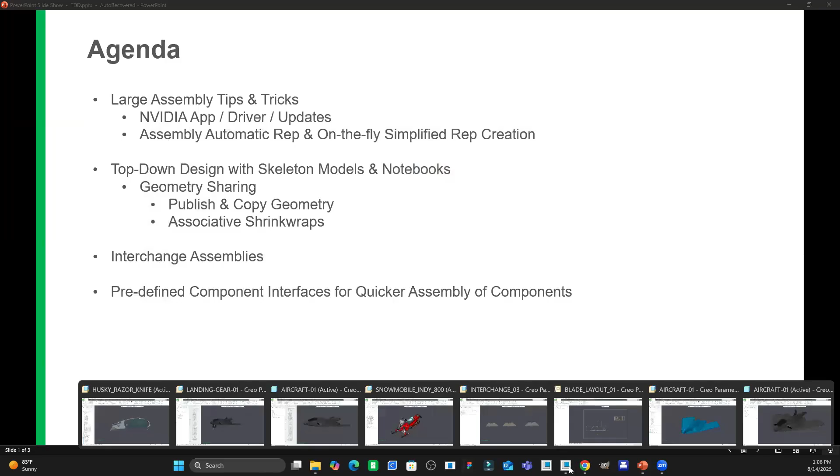All right. So now we'll just take a look at, this is a snowmobile that I opened up, and it took quite a bit of time to open it. It wasn't too bad. My computer's pretty beefy, but I wanted to show something that will help you with very large assemblies and being able to open those up quicker. So I'll close this out.

All right. So I have my directory set here, but I'm going to go to open, and I'm going to locate, and there's a quick access. I can filter parts, drawings, and assemblies. I'm going to locate my snowmobile assembly, select it, and if I go to open, there's a drop down and

there's automatic. So if I select that, it's going to open the assembly with the least amount of data that it can. So it's going to be a very lightweight rep of the assembly, basically just for visual purposes. So that was pretty quick, right?

And that's because it's very lightweight, right? So if you just want somebody to be able to open up the assembly, or maybe your manager is going to walk by, or there's a coworker, you're like, hey, I want to show you my progress and just spin this thing around. This is great.

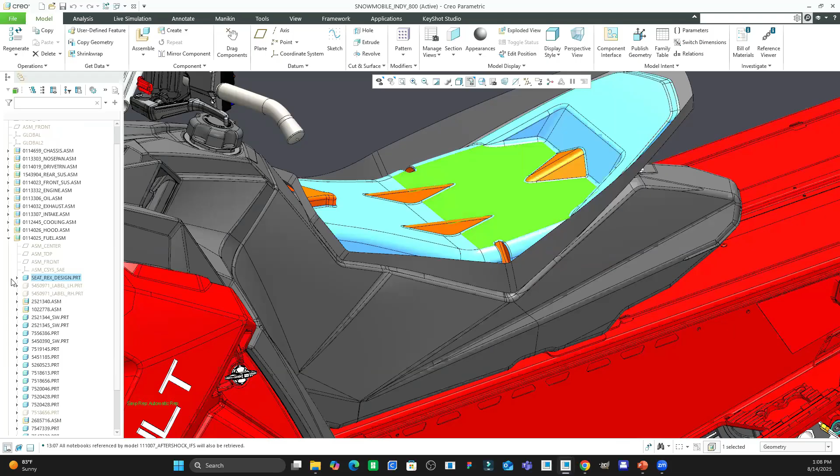Now, if you have to work on it, you can actually retrieve all the data that's associated to the parts so that you can work on it. So I can select this, for example, and then there's a retrieve icon in the mini toolbar here. And then when I do that, that gives me access now to all the features and stuff of the part so I can work on it. Okay.

I also want to show this. So I'm going to open up the assembly again. And a lot of people don't know that you can say, for example, you only have to open up a specific subassembly of a larger assembly or something, right? And you want to not have to wait for your large assembly to open. What you can do is you can go to find your main assembly again, your top level assembly, go to open, and then there's open representation.

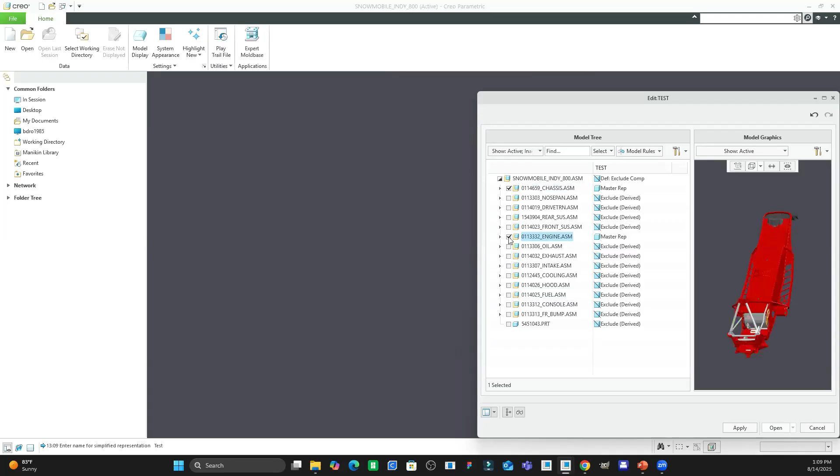If I click that, I can either select a rep that I previously created, or I can define a new one on the fly here. So I can select this button like that, and I can give it a name. And then from here, I can say, hey, I just want to open up the chassis, or I just want to open up the engine and the chassis. So those two assemblies, right? So of course I could have named this rep chassis and engine. It would have made more sense.

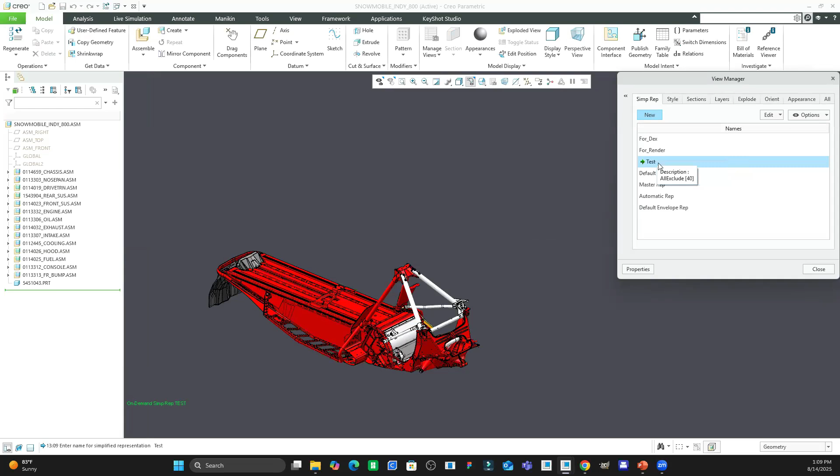But now on the fly, I can click open, and it's just going to open up that rep, and you can see it here in the view manager, that I have that test rep here. Okay. So it's just a couple of what I would consider tips and tricks here. Okay. Now I'm going to close this out.

All right. So now let's go to a different assembly. Or actually, let me move to this slide. So now we're going to talk a little bit about top-down design and concurrent engineering and designing. So, a lot of companies use a bottom-up approach, and sometimes it depends on how experienced the engineering team is, how large or small the team is. If you have a few guys that are really experienced and the products aren't extremely complex, a bottom-up design approach may be just what you need. And incorporating a top-down design process may just convolute things and add complexity that you don't need.

But if you're working with large assemblies and there's data sharing, and you want to streamline your assembly process and have people working concurrently on the assembly without problems, then incorporating a skeleton part for the top-down design process is good. So to start off with, to incorporate the top-down design process, it would fall on the lead integrator slash designer, or the engineering manager, or the head engineer, and they would come up with a plan as far as what to include at the top level in the skeleton model to drive changes throughout the assembly, or to propagate changes.

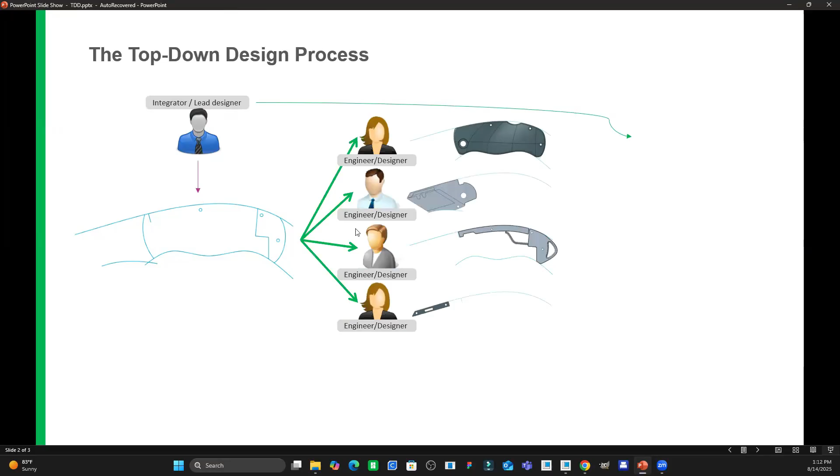And then there's another engineer, and you can see that he's developed this skeleton sketch of the razor, and all these different engineers are sharing that data into their subassemblies or parts, right? So these blue lines are the sketches of the skeleton part, and they've shared those in, and they've created an association between the solid geometry and those sketches, so that if the sketch in the skeleton part is updated, those changes propagate to these components and they update without any problems, which is pretty powerful.

At the skeleton part at the top level of the assembly, you could add solid geometry as well to the skeleton. And the good thing is that whatever you add to the skeleton will not add weight to your assembly. And also you can exclude that skeleton part from your BOM as well.

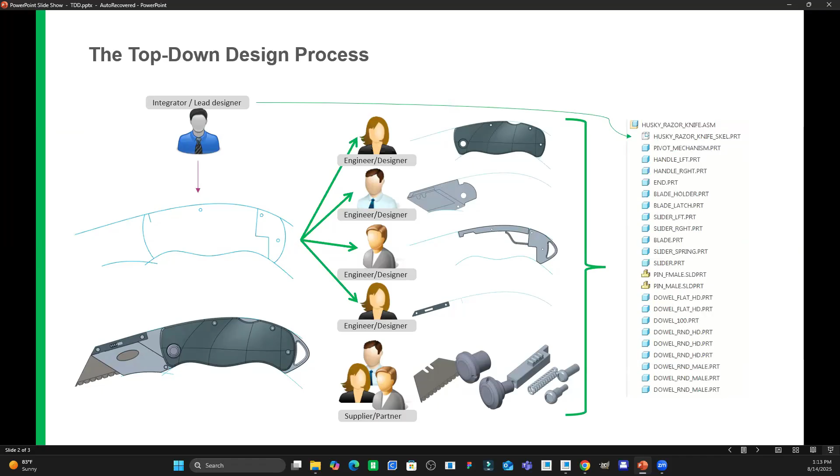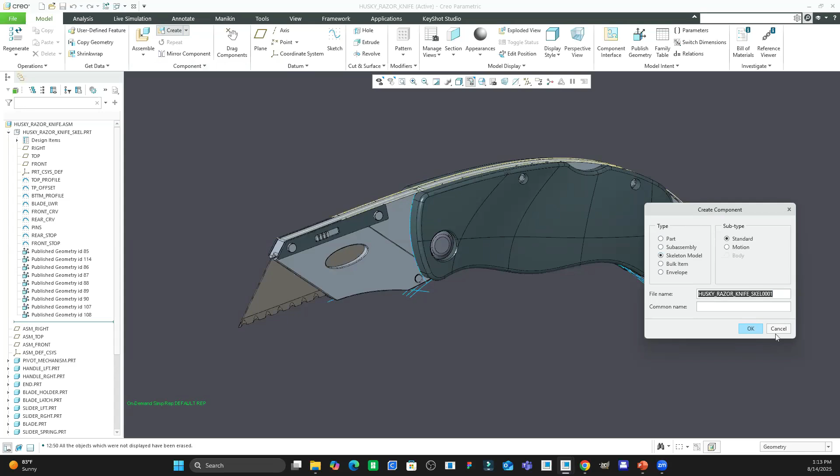Okay, so here's the actual razor assembly and the Husky razor skeleton part. You can create the skeleton part from the create button in the component group in the ribbon. So there's part and then there's skeleton model. You would just select this node and give it a name. We already have that, and you can see here that there's different sketches that are named that drive the assembly.

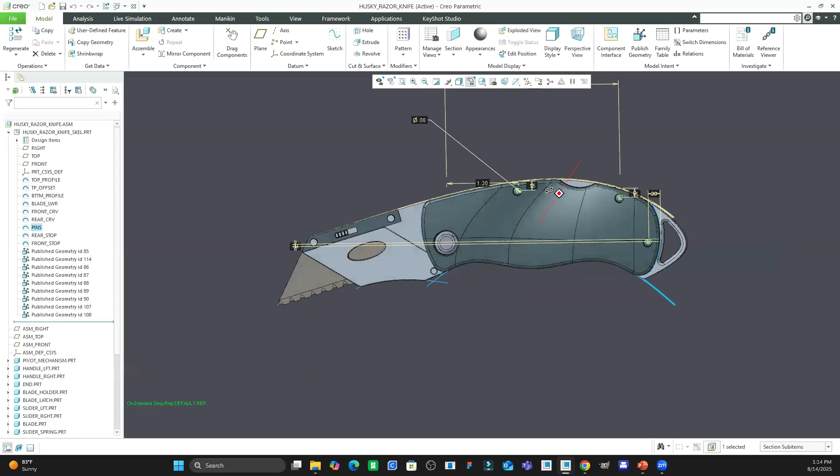So there's top profile and highlights in green here, right, in the window, top offset, bottom profile, and we can go into some of these. There's the pin. So if I go into my edit here, you can see that these pins are created here in this sketch. We can move these things around. And then there's these published geometry features.

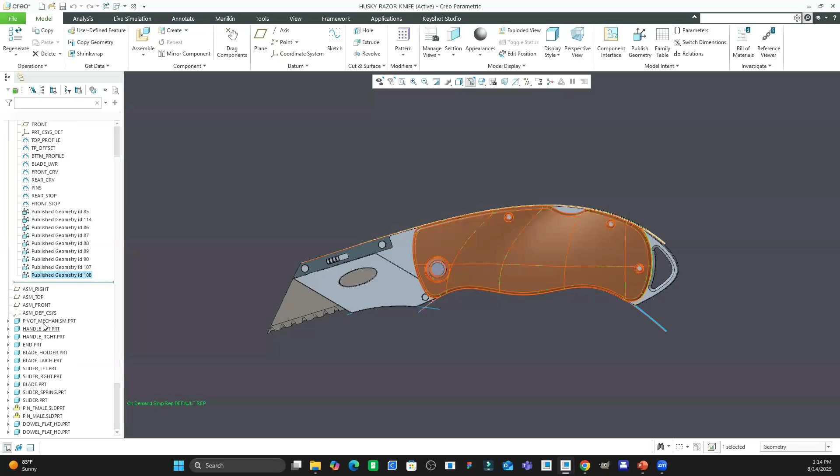So after you've defined the data that you need in the skeleton part, whether they're a combination of sketches, additional datums to the default datums, surfaces, or whatever, if you want to make it easy to share that geometry or data into parts, you would create a published geometry feature. So for example, I would go to model intent, or, go into my part here,

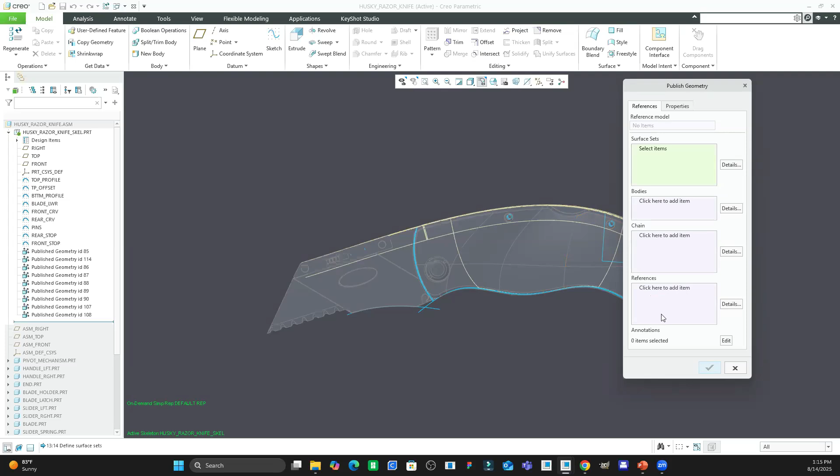model intent, publish geometry. So the published geometry lets me collect surfaces, bodies, chains or curves, and references, right? Like datum planes and coordinate systems, axes. So I can collect all four of those types here, right? And then once I do that, if I want to share that geometry into a part, it's very easy.

I can go into my component, activate it, and you can actually see they already have four of the external copy geometries, which are actually the published geometries from the skeleton part. And to do that, all I have to do is create a copy geometry feature, and you can see it automatically enables the published geometry in the content group.

And if I want to share any of the published geometry from the skeleton into this component, all I have to do is just select it here. Okay. Now that's all already been done, so I'm not going to do that. Now, if you didn't create a published geometry feature to share geometry, that's okay. You can still share geometry from your skeleton part. You would just have to deselect the published geometry button.

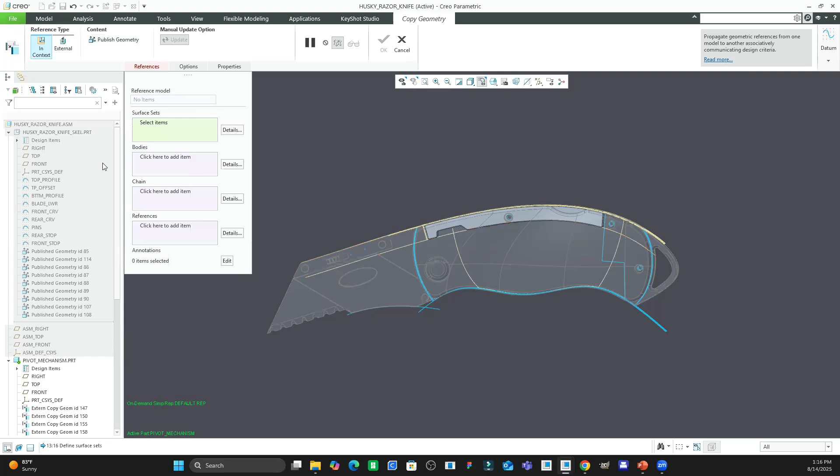And then from here, you would go in here and select the surfaces, bodies, curves, or datum planes, for example, that you would need. Okay. So if I select each one of these, there's a top profile curve, and then there's that curve, and there's a location for the pins, right? So all this stuff is shared here.

Now I want to show you the power of this, right? So obviously this takes more time up front. The bottom up approach is, different engineers are working on their assemblies or their parts. Then at some point they have to assemble all those together. But the problem with that is that if you have to make changes, a lot of times those relationships, those constraints will blow up in the assembly.

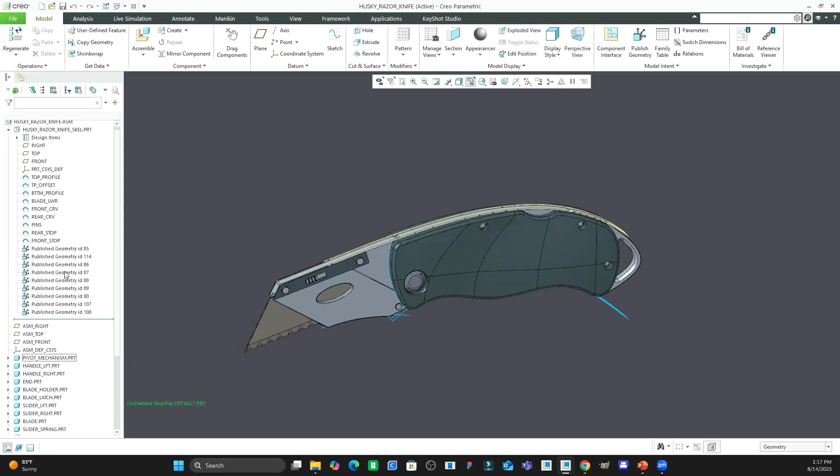But if you spend a lot more time up front planning out your skeleton part and what needs to be in it to efficiently and quickly drive changes throughout your assembly, it makes that time you spend up front worth it, right? So just to show you this, I'm going to take the top profile curve, and I'm actually going to go into my sketch and kind of show you how this is laid out, right?

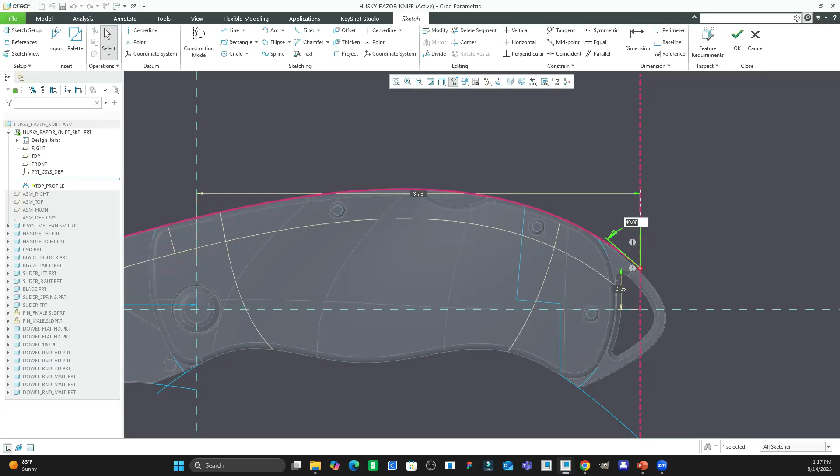So if I want to, I can change this angle from 49, right? I can say, hey, let's make that 50 or something. Exit out of that. I can change this bottom profile curve as well. This is actually a spline. I want to grab this one. I can change that spline and move that out.

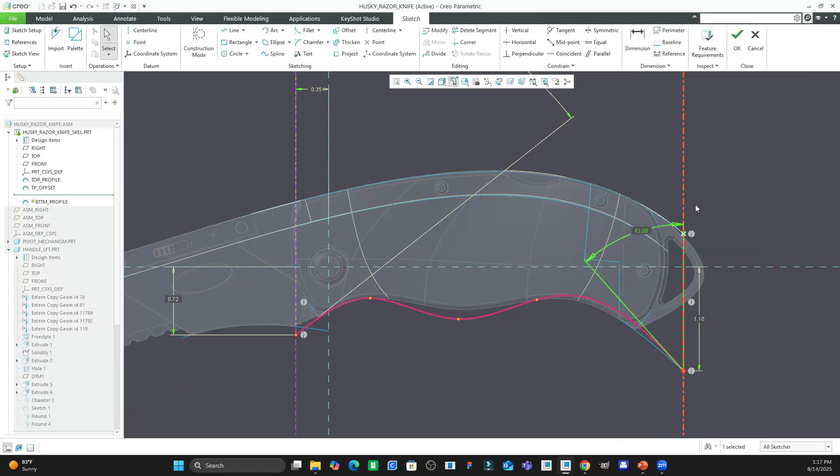I can change this angle, right? I can make that 42, right? Then if I regenerate this, right, all the components that are associated to those curves also update. So you can see there's no errors or anything.

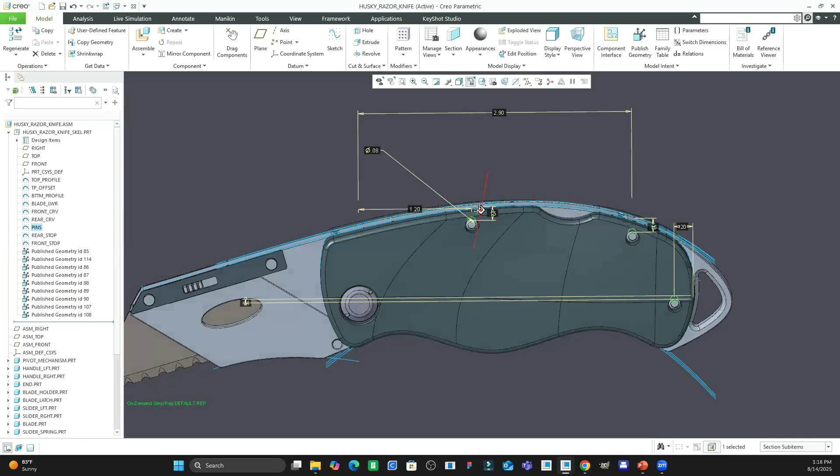I can also change the locations of the pins. Maybe I'll move this in a little bit. Moved it over.

Regenerate. That moved over just fine, right? So this is very powerful. And like I said, a lot of people, when they talk about skeleton models and top-down design, they have a lot of questions and they're kind of leery about incorporating it into their design process. Actually, that makes sense because I think that subconsciously engineers know that there's a lot more time that needs to be spent up front to develop this, but it's well worth it.

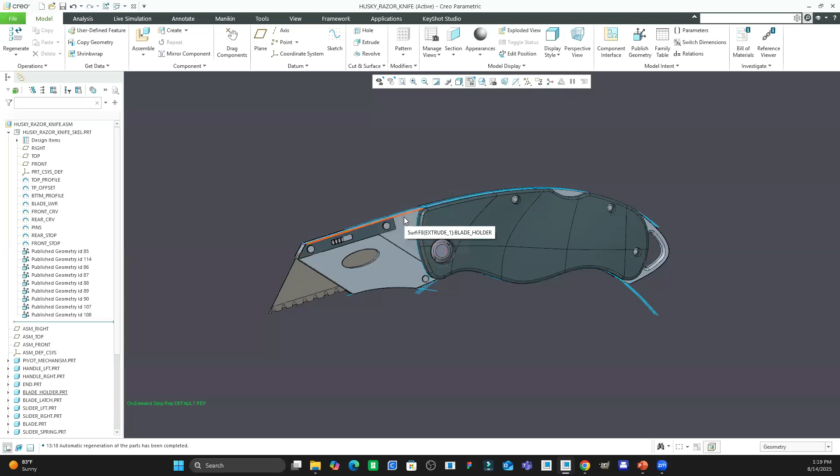There's also a functionality, Bill, called... Bill, sorry for interrupting. There's a question in the chat asking: Oh, is there? Okay. Why reference a published geometry instead of the sketch directly?

Yeah. So published geometry is used primarily for readability. So when you create your skeleton part, you want to create this in a way that makes sense. So say for example, there's a design engineer or a lead engineer that develops a skeleton part, but they leave the company, or they get moved off the project and somebody else has to take the project lead. Whoever's in charge of developing this assembly needs to know how this skeleton part was created, why the elements of it were added, right?

How it was structured. So if I create these published geometry features, I can actually name them, right? I can rename this if I wanted to. So I want to be able to know what I'm sharing and where it's shared to. So ideally, I can rename this, and even rename this, for example, so that whoever I hand this off to, whoever is involved with this assembly, can look at the skeleton part, look at the external copy geometry features and the components, and know exactly how it was created, why it was created, and where that geometry is shared. If that makes sense.

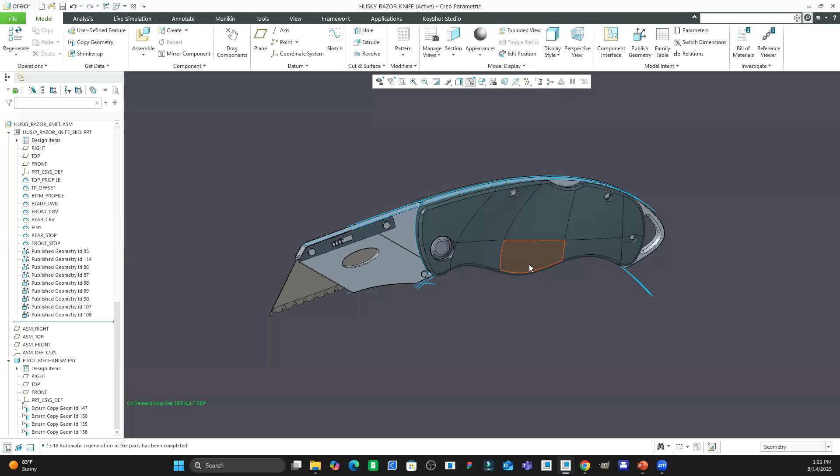And it's a lot easier to select the published geometry feature than it is to select all the features in the skeleton that you want to share. If I'm like, hey, this mechanism right here needs this top curve, this bottom curve, and this front curve here, and maybe a coordinate system or a datum plane, I'd rather have it all contained in one published geometry feature, because it's easier, it's a lot cleaner, and it's a lot more efficient to do it that way. I hope that answers your question.

Partially, but thank you. Okay. Well, you're free to ask me anything else you'd like. I don't want to derail the meeting, but you named the sketches as well, right? So it seems like you're doubling the features in your skeleton. I don't really see the gain, because the whole history or design intent could be well documented by naming the sketches, as you did. I understand you can rename the published geometries, but if you already do that with the sketches, features are already identified clearly, right? Yeah, you're correct.

But going back to the point I made about published geometries being able to contain multiple elements of the skeleton, such as surfaces, datums, sketches. In this case, because the assembly doesn't really have sub-assemblies, they're just components. Yeah, you're right. You could just do a copy geom feature, and these sketch features are already named, so you don't really need the published geometry feature. But published geometry features really come into play when you want to grab a whole bunch of data and consolidate it into one single feature. Got it. Okay, thank you. That makes more sense now. You're welcome.

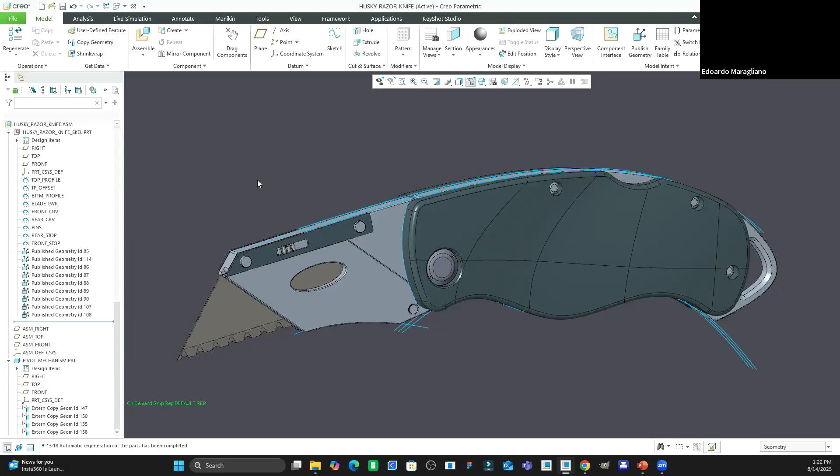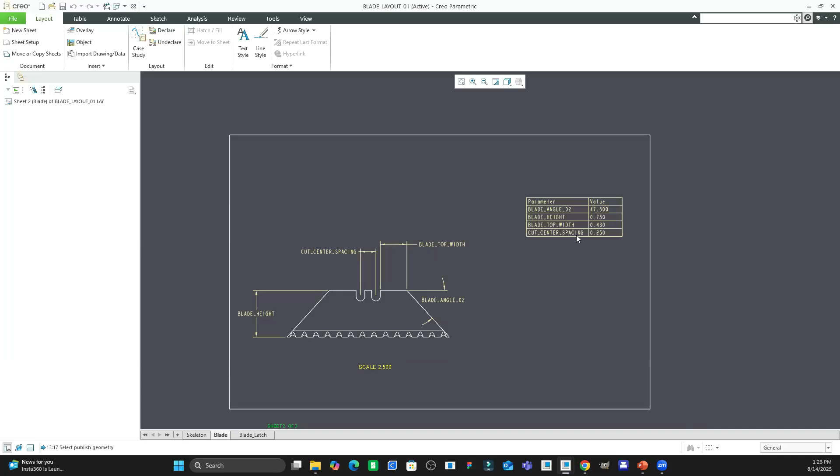Okay. So now let's also take a look at these notebooks. So this is a blade layout. Whoever developed the skeleton model may also want to control who has access to certain dimensions. There may be some dimensions that need to be controlled at the top level that nobody but that person should have the ability to change. And notebooks are a great way to do that. So this is a notebook of the blade, and you can see I've created these parameters in here. Basically you create parameters, which are the dimensions, and then here's the repeat region table. And this is very easy to create.

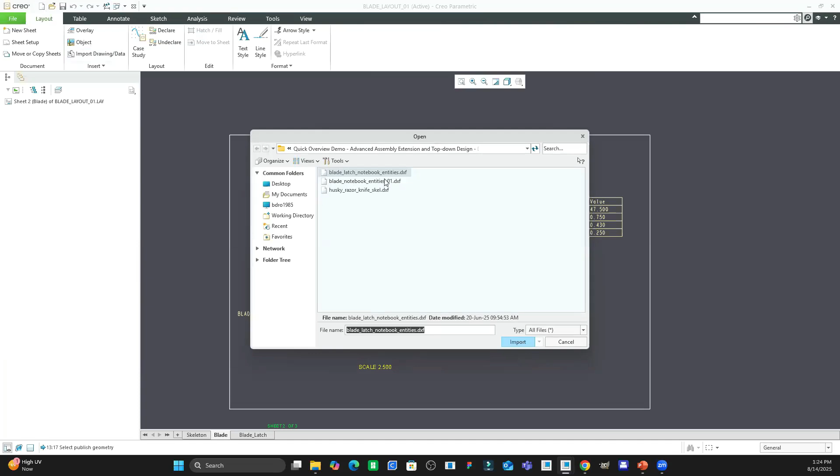All I did was create a drawing from the blade here, and then export a DXF of that drawing. Then I went to my layout. The layout's here. There's new notebook; you can create it there. And once you have that, you can import your DXF file very easily. And once you create this layout, you can drive the dimensions in your assembly with the layout. So if I go back to my assembly and I open up this razor, let me grab these dimensions.

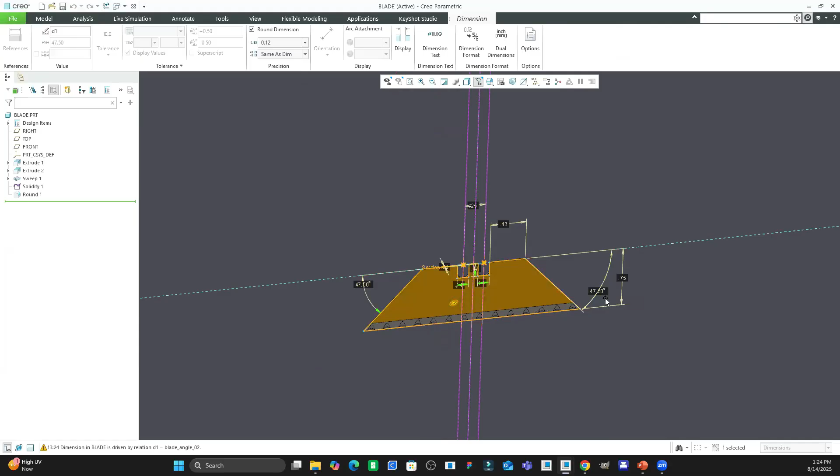All right, if I double click this 47.5 dimension here for the angle of the blade, you can see that I get a message in my status bar down here saying that the blade is driven by relation D1, blade underscore angle 02. So basically what it's saying is you don't have the authority to modify this dimension because it's controlled by the notebook that it's associated to.

And if I go into my relations, you can see that these parameters are the same parameters that you would find in the notebooks. If I go back to the blade layout, there's my parameters. They're also here as well.

So this can get as complex as you want. You can see you can create a layout for your skeleton too, your latch. It's really up to you to determine how to create this and what's the best way to create it for your specific product.

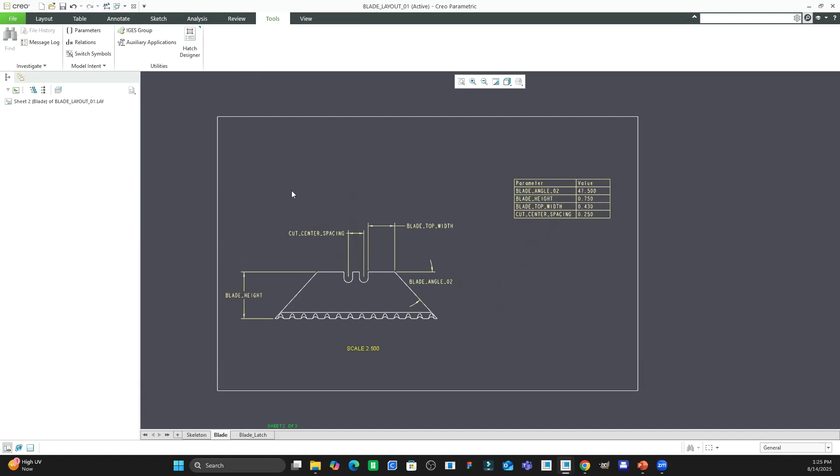I also want to show, I do a lot of surfacing work, so I want to kind of show how that's integrated with top-down design as well. So let me go to this.

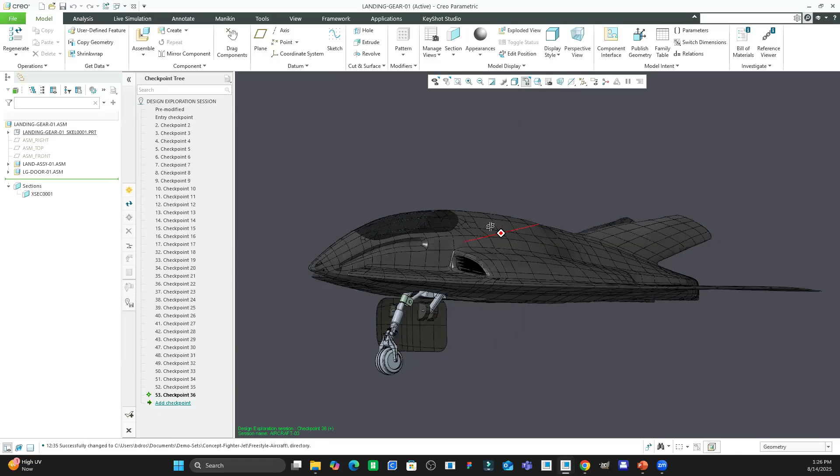So this is a fighter jet concept that I created. And you can see, I can walk you through it. There's a landing gear assembly that I was working on, and there's the retracted, there's the extended version of the assembly, there's the different turns, right?

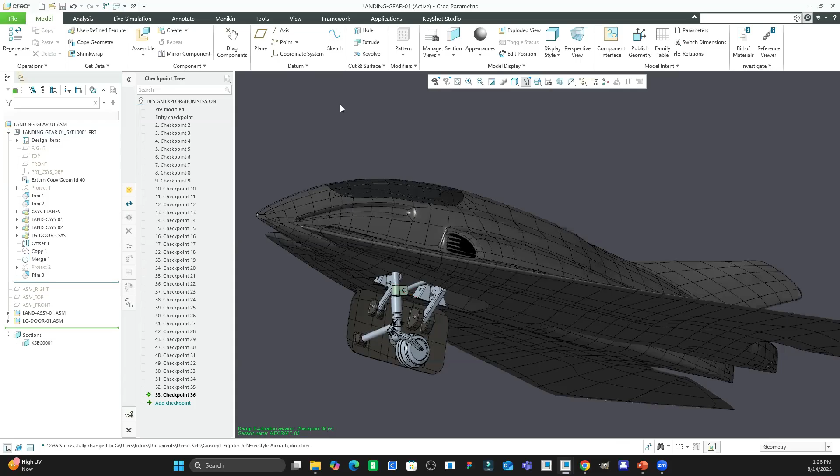So the reason why I'm showing you this is that this is a concept, an aircraft concept, and it's still being driven kind of through the skeleton part. Now, this was originally designed in Freestyle. If any of you have seen that, Freestyle is a subdivision sculpting tool that lets you model almost like you're sculpting with clay. So what I did was I created this concept, and then I shared that data, that geometry, into this skeleton part.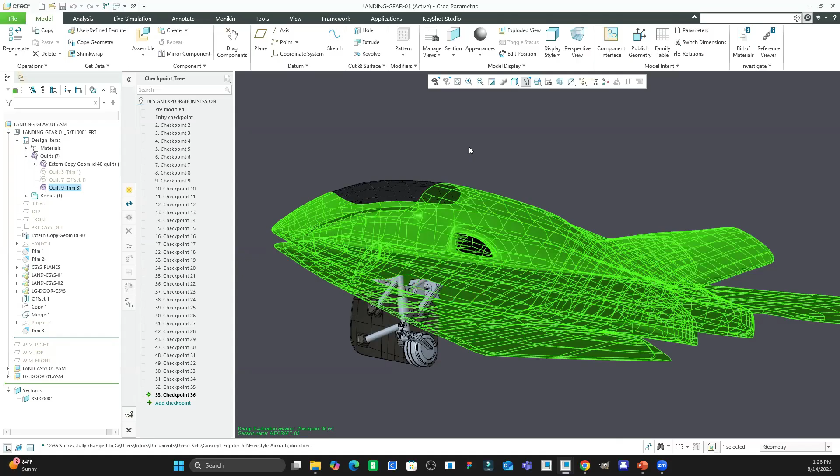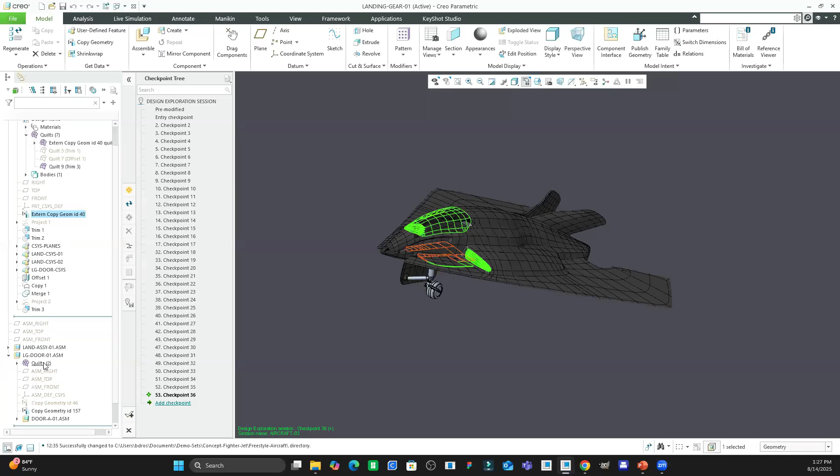And then I also cut out from that data, this quilt and the skeleton part, the door for the landing gear. And you can see, I've got my surfaces here. I have my external copy geom feature coming from the original part where I designed the aircraft, and then if I go into my assemblies, there's a copy geometry feature here.

There's also one right here for the door. So you can trace this, all this data, back to the original part that I can open up and then show you where this was created. So that's going to be right here. So here's the original aircraft.

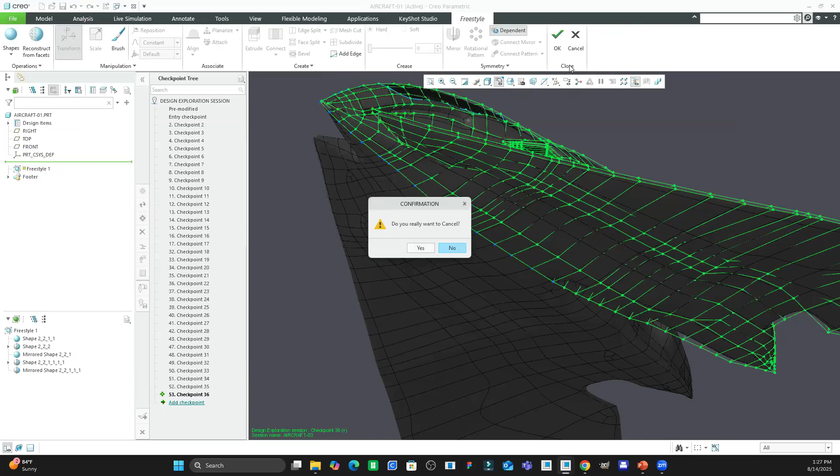Here's the freestyle mesh that was created. So if you follow the trail here, it all started with this. I created this. I created a published geometry feature that we just talked about, and that feature contains these different quilts. So there's the overall mesh, and then there's the canopy, and then there's the venting here.

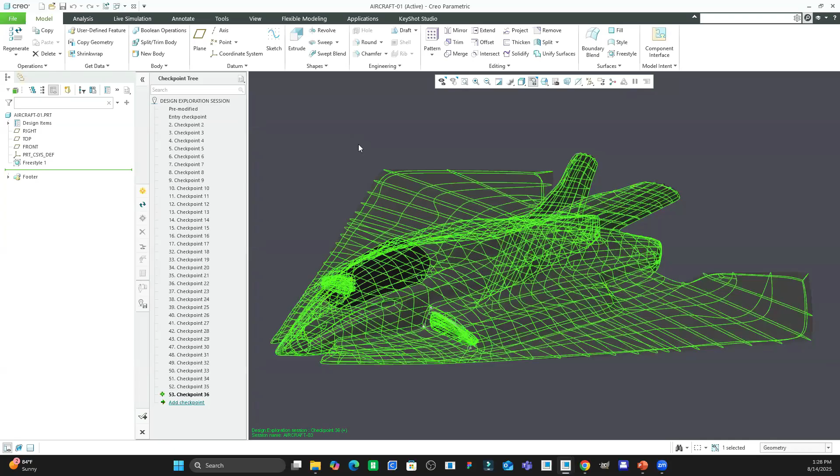All that stuff was created as a published geometry feature, and then that was brought into this skeleton part right here. And then once I create my skeleton part with all the different datums and stuff that I needed for the landing gear, I then shared that geometry to these different assemblies for the landing gear. I guess I'll just pause there if anybody has questions.

Bill, I've got one question. So, are we using the AAX now? And is it a separate license that costs more?

Yeah, so this skeleton part is accessed through the Advanced Assembly extension, and it does cost more.

Is it typical that people working at bigger companies have it, or is it kind of bundled? I'm just wondering.

Yeah, so you can buy the extension separately or it's bundled. I believe it's included in like the tier 3 package because there's Creo Design Essentials, there's Creo Design Advanced, and I think then there's Advanced Plus. So I'd have to check to see if it's included in the Advanced, which is the tier 2, but I know it's probably included within the tier 3.

Yeah, companies working in aerospace and medical devices and automotive, they're definitely using the Advanced Assembly extension. If they're not, it's got to be very challenging for them. Okay, good, thanks. Sure, no problem.

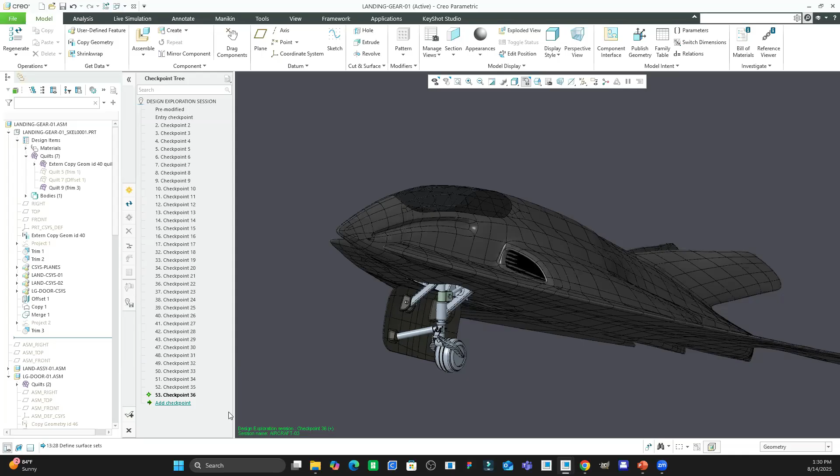One of the things that's nice about the Advanced Assembly extension is the ability to swap out components. There's an interchange assembly feature that we'll look at now. We're looking at this on a smaller scale with this blade, but if you use your imagination, it's not hard to see how it can apply to a larger assembly. Maybe it's an engine you want to swap out, maybe a different transmission, braking system, or whatever. But the concept is the same.

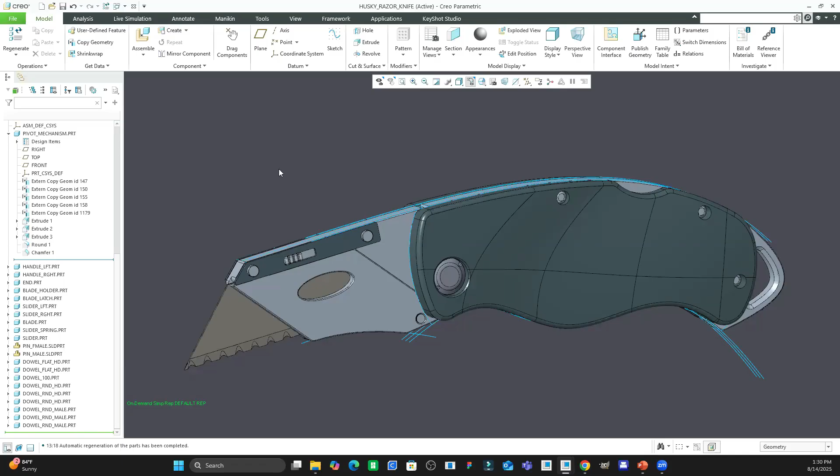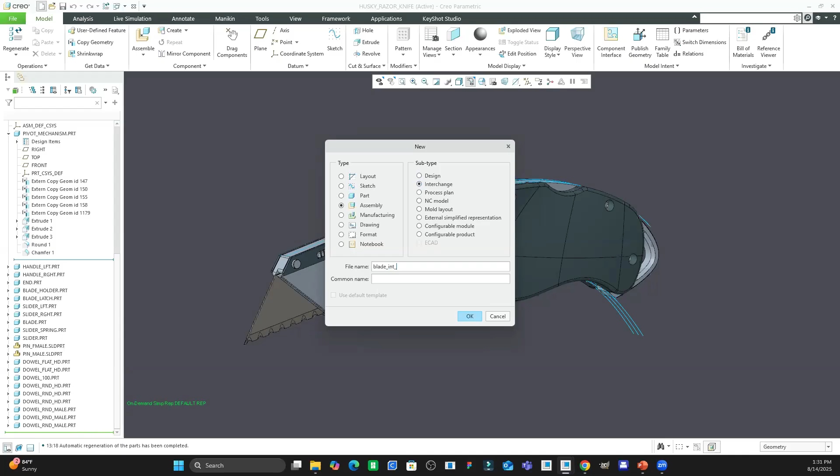So what I've done is I've created 3 different blades. I've changed the angle on the blade, for example, in a few of them, and some other different things. Once you create the variations of your part or assembly, you go to the assembly node, and there's an interchange assembly option right here. You can give this a name, like blade interchange, and click OK.

Then what you're going to do is bring in the variations of your part or assembly. In my case, I'd bring in the different variations of my blade, which are blade 1, 2, and 3. I might move this one over.

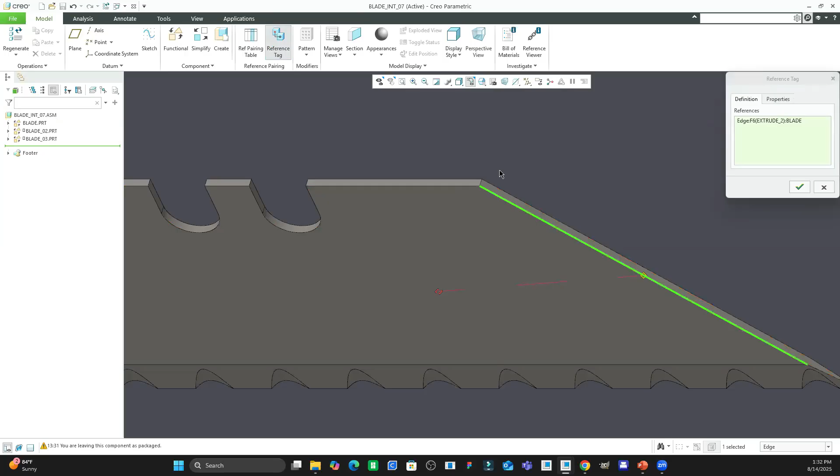Then I'm going to define the references on the blade that I use to assemble. For example, I'd go to the reference tag collector and say this top surface will be a reference for constraining on all the blades, and then this front surface, as well as this angled right surface. You can see that's going to show up here in the footer - there's the references for constraining. Once you have those tags created, there's the reference pairing table.

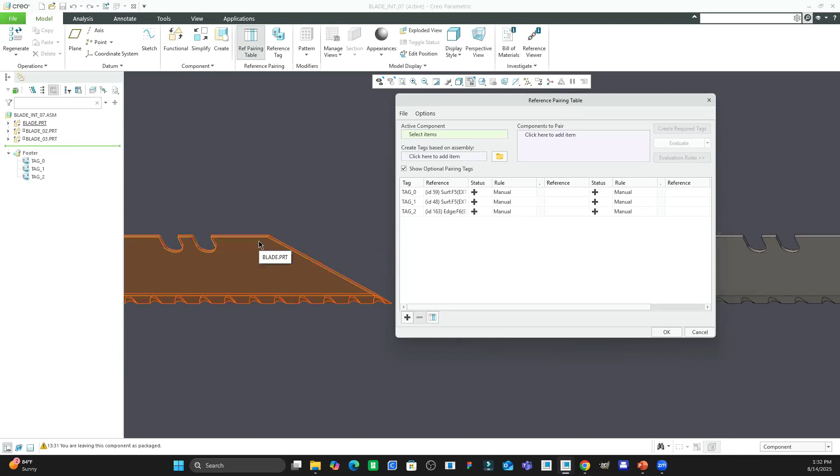Now, if you already have an assembly, which I do, where the constraints on the blade are defined, you can bring in the assembly. So I can find that Husky razor knife assembly, and as long as I add these two components that I'm pairing it with, it'll automatically find the references in this first blade and apply them to the second and third. But I want to show you the other way too.

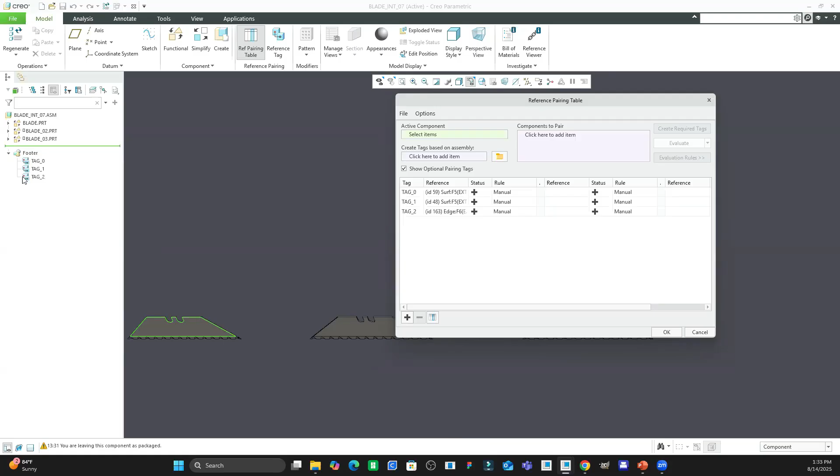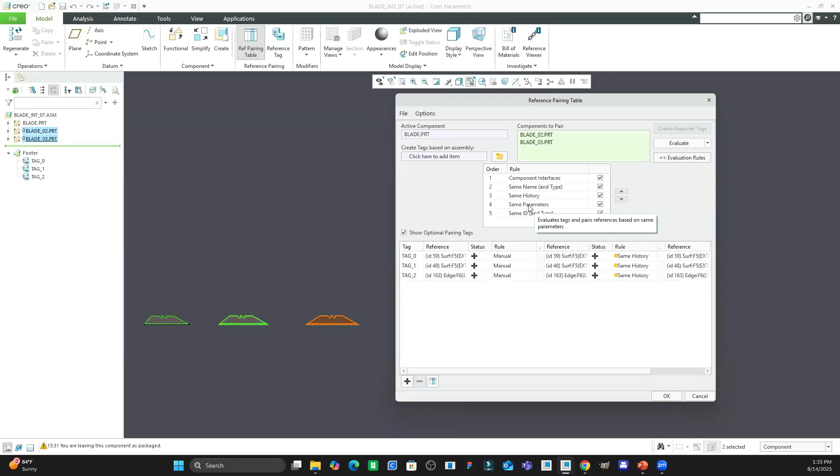Here's the tags, the tag column, the same tags that are here in the footer and the model tree. Now I need to select the active component, which is this one, then my components to pair, which are these two. Then I click evaluate, evaluation rules. You can see they now are going to share - every one of these blades is going to share the tags that were created. And there's component interfaces, inheriting the same parameters, history, all that stuff.

So I've already done this, and I've created one. I'm going to erase this. What's cool now is that if I go back to the razor assembly, I can swap out that component, or if it was an assembly, for another.

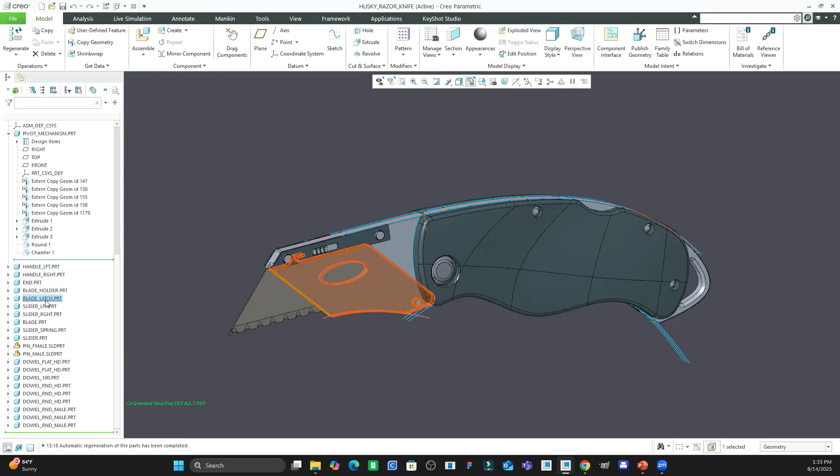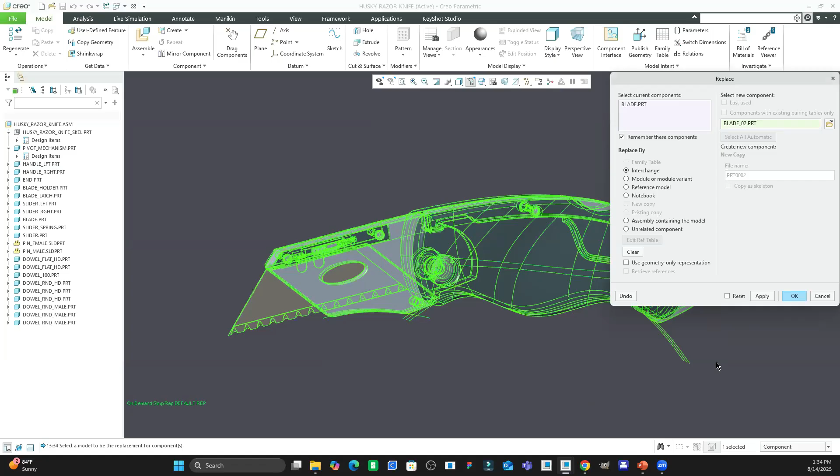So I can grab this blade right here, the blade latch, and do a replace. Then if I choose - there's an interchange node right here - and if I select that, I can click open, and this shows me the different versions. There's interchange 07, blade 2, and blade 3. I can select either one of these, click OK, apply, click OK. And now it just seamlessly swapped out the original blade for the second version.

You can imagine how powerful this would be for swapping out different components and assemblies, because you might have a different version of a vehicle or the product that you're creating, and you want to be able to show those options.

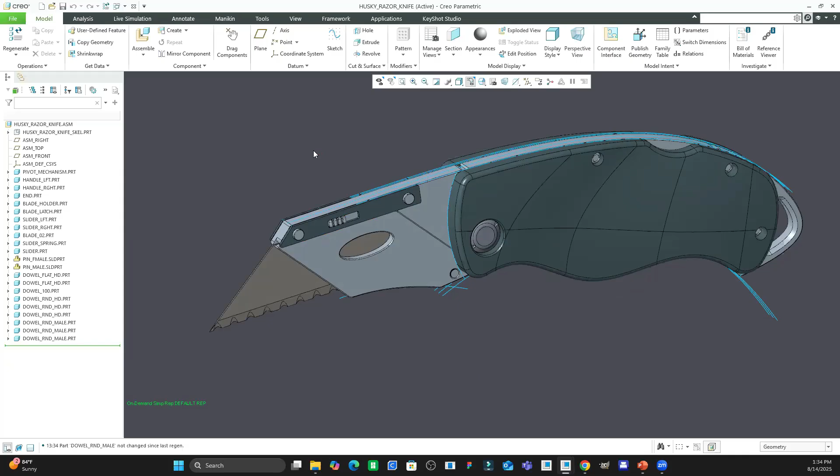Okay, so the next thing I want to talk about are the component interfaces. Let me just make sure - let me pull this up and move it to the side here a second.

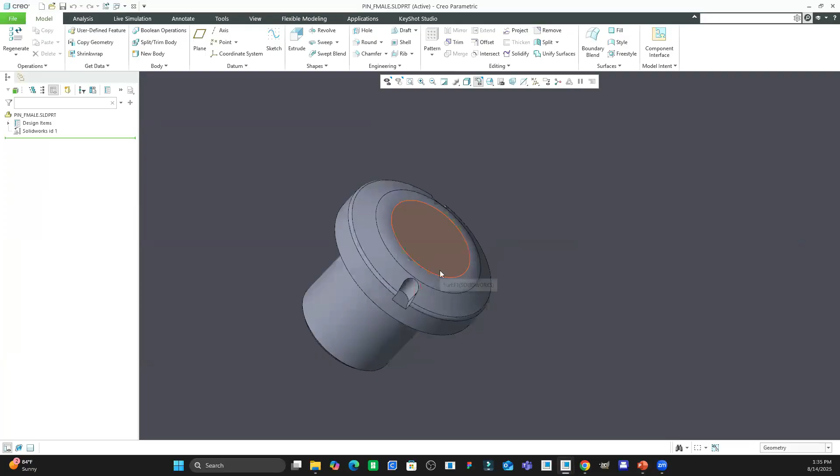So I just opened up this pin right here. Up in the ribbon here to the right, there's the model intent group, and if I select that, you can see there's an interface 001 that I can create. In here, what I'm going to do is define the references on this pin, so that when I assemble it to the razor, I don't have to define these surfaces when I constrain it - only the surfaces that they constrain to in the assembly. So it saves time, it saves me basically two clicks.

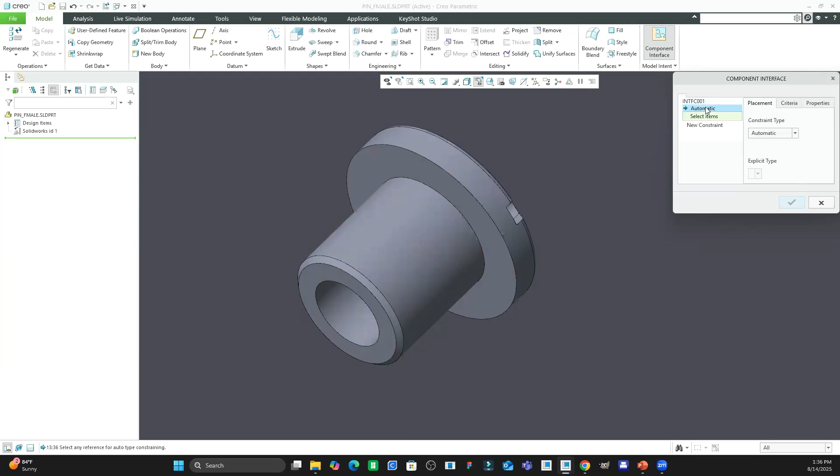Because I'm going to define this cylindrical surface in the bottom of the head here, this flat surface. So I would create a new constraint here, give it a name - I'll say placing, for example. Automatic - I could say let's make this a coincident constraint for that surface, and then a coincident constraint for that flat surface. When I do that, it creates this folder down here with the interfaces.

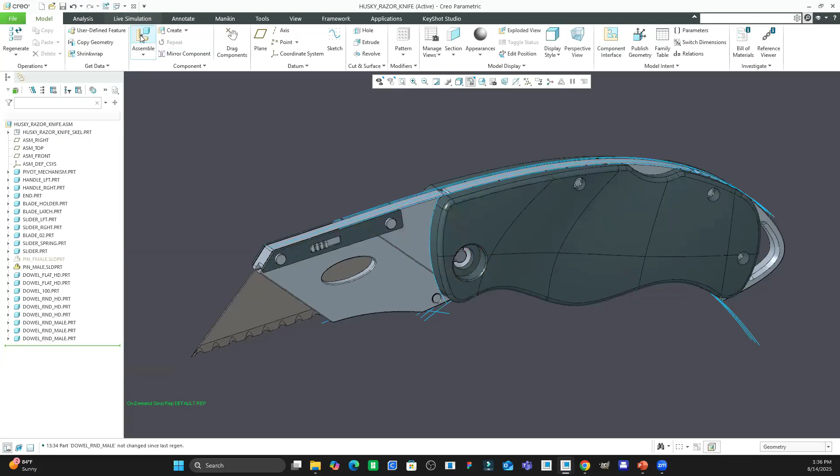The power of that is if I just hide that pin, when I want to assemble the pin, I'll just look for it here.

You can see that when I assemble it in, I've already defined the two constraints, or the two surfaces I'm going to use to constrain, previously through the component interface. So all I have to do is select this surface and that surface to mate that component. That's another little thing that really makes assembling a lot faster within Creo.

So far we've covered some large assembly tips and tricks, talking about the NVIDIA driver and the updates with that, and checking on that. We've talked about assembling the automatic rep option so that we can open up these large assemblies a lot quicker, and if we need to, we can retrieve the component data. We've talked about creating an on-the-fly simplified rep, and about data sharing and skeleton models and notebooks.

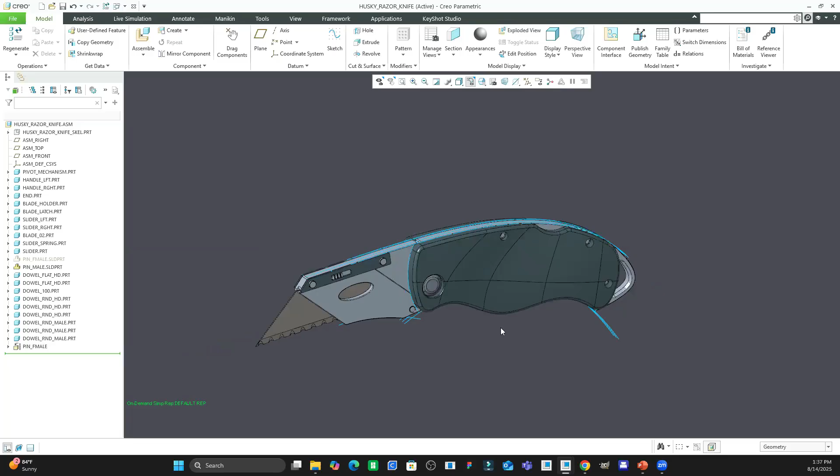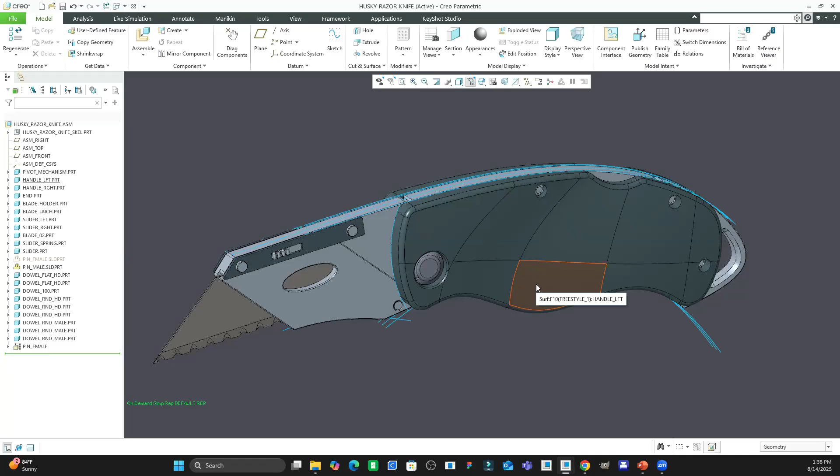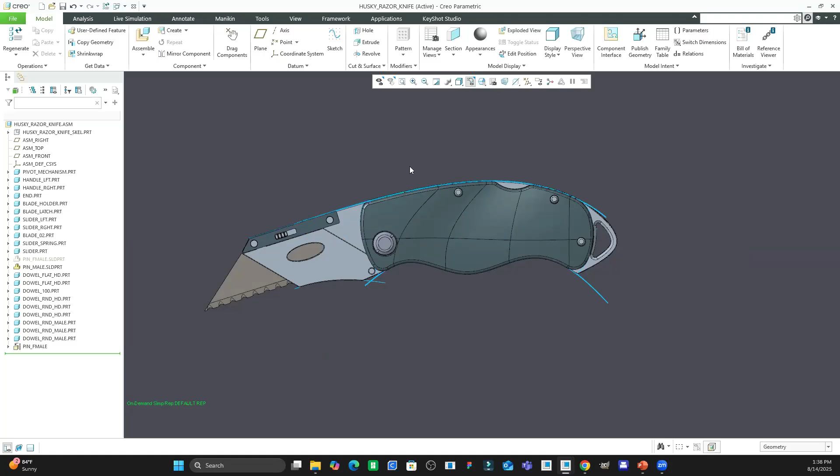Now, one thing I also want to talk about are the associative shrink wraps. What's great about the advanced assembly extension is that I can create a lightweight shrink wrap of this assembly that can be shared with anyone. The great thing is it's lightweight, it's easy to share, and the person I share it with can't modify the data, which is good. So if there's a new engineer that was just hired, or somebody with less experience, and they need data from this assembly to use or visualize, but you don't want them to be able to modify the assembly, you can create a shrink wrap and share it with them. And the great thing is that whenever you update the assembly, say I make changes to the skeleton part and the shape of this assembly updates, because the shrink wrap is associative and it has these external copy geometry features, the shrink wrap will update.

So for example, we'll create a new part here, and we'll call this razor associative shrink. Okay, and we'll go to the copy geometry feature, or the shrink wrap feature, sorry. What I'll do is open up my razor assembly right here.

I can grab the outer shell surfaces, I can do a manual selection, or there's an auto collect solid geometry option, which I'm going to use. It asks, would you like to exclude internal components? In this case, I don't, I want to keep them, so I'll say no. Then if I go to the options tab, there's now an option for bodies, which is great. So now I not only have the ability to create a quilt shrink wrap, but I can actually create a shrink wrap that contains the individual bodies of the assembly. I can merge all the bodies together, or keep them as separate objects. I'm going to keep them separate.

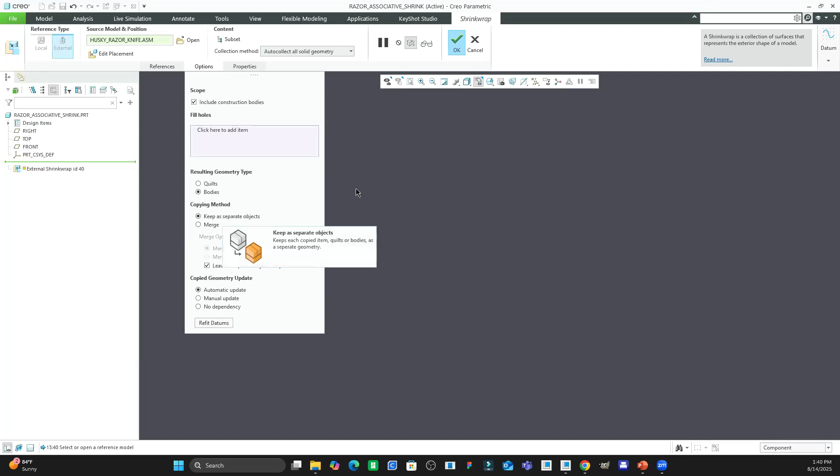I'll click OK. All right, so now there's my shrink wrap part. It's more lightweight, doesn't contain all the features of the assembly. Then there's the individual external copy geometry features, and we have a list as well of the 21 bodies. So that's a new associative shrink wrap feature, this new bodies shrink wrap. And then of course, we have all this associativity.

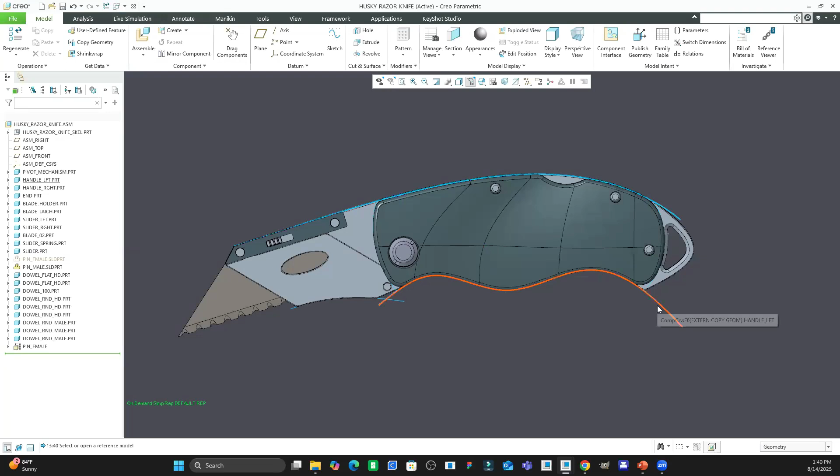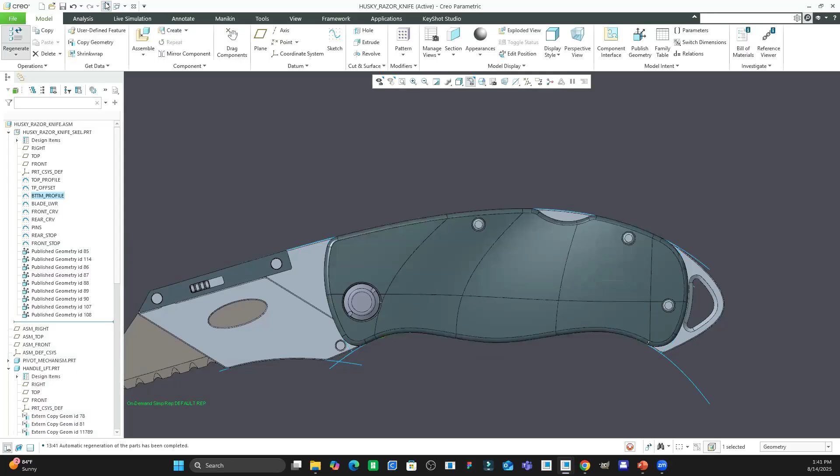So if I go back to the razor, let me grab this one from here again, the bottom profile. If I modify this and bring it back up a little bit, and maybe change the angle here, then regenerate, and if I switch back now to the shrink wrap and regenerate, you can see it updates with those changes. Pretty powerful.

Okay, I'll just pause here again. Any questions?

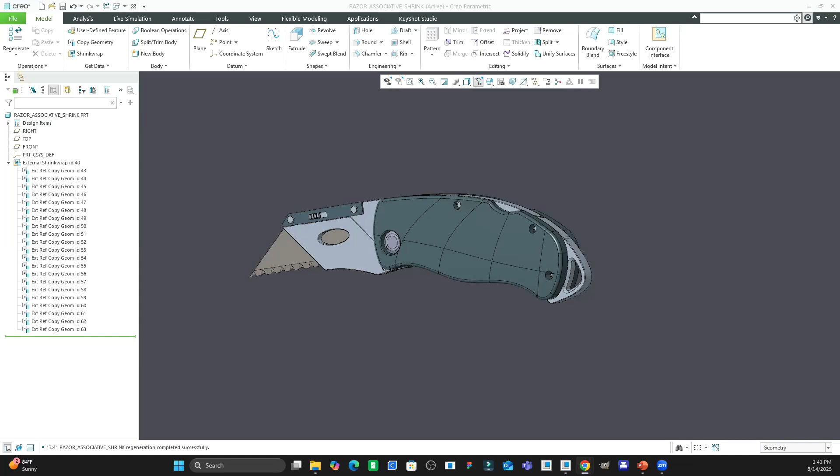Bill, I'm just trying to remember through memory the steps he took to get that separated body shrink wrap. I got: create a new part, make a shrink wrap, copy geometry, select the assembly you want to bring in, and then from there it's the plus options. Yeah, so I went to the collection method and changed that to the auto collect all solid geometry, and then after that, like you said, I went to options and just selected the bodies node.

You're probably trying it on your end, huh? No, I'm trying to write down. I'll try it later. Oh, you're writing it down? Okay. And remember, if everything goes okay, this should be recorded and you can look back at the recording on YouTube. Hopefully that'll work.

Yeah, we got a lot of base machines with fixtures that go inside of them. But if you shrink wrap a machine with a safety surround on it and everything, you can't see inside of it very well. But if you separate the bodies, you can hide the surround, you can hide other things to see things while keeping it light. I like that. Exactly.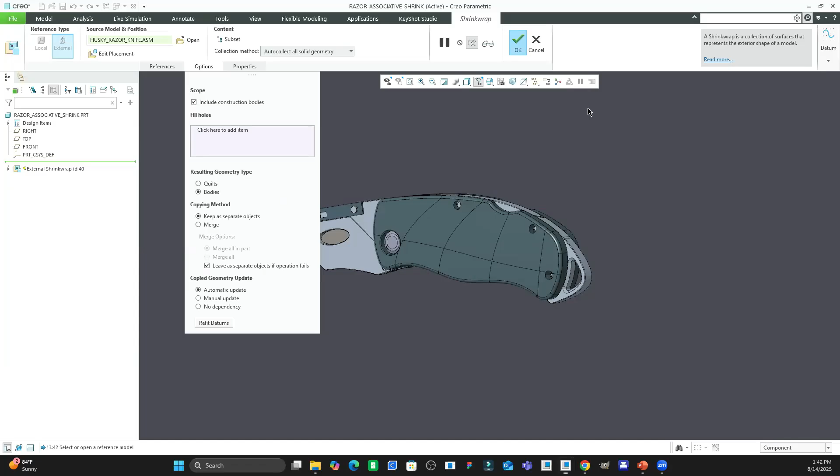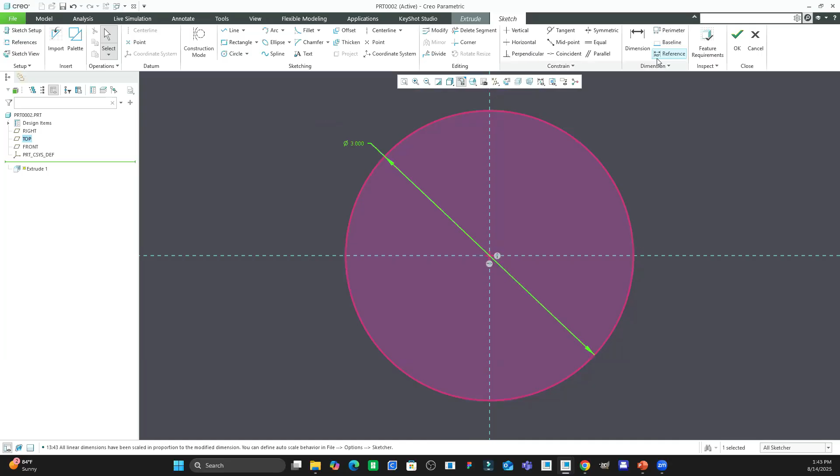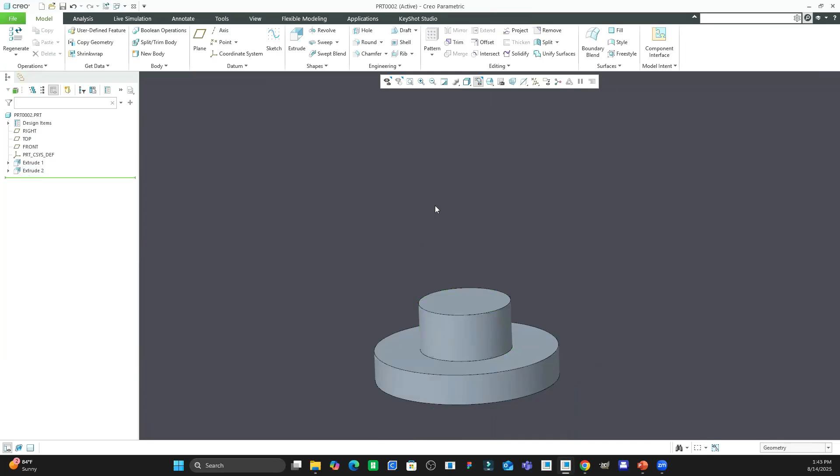And then let me also show something really quick here. This is going to be kind of rough, but I think it's worth talking about. Just create something really quick. All right. Just place a hole here a second. You just add some rounds. I probably should just add a couple more. Okay.

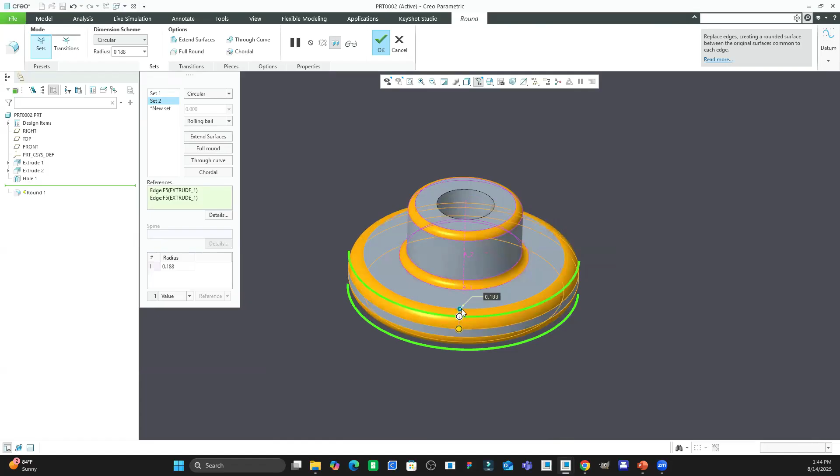All right. So there's also the merge and inheritance feature, and you guys have probably heard about this a little bit. Maybe it was a while ago, and this is a refresher. But say for example, and I should press this all the way through. One moment. So say for example, you're creating a casted part or something, and you need to share this data with the machine shop, right?

Well, it's cool because with the merge inheritance feature, you can share a component like this, so that whoever's on the shop floor that has to make adjustments to it so that it can be manufactured correctly can make changes to the model that won't change the original model, right? So for example, this is part 002.

I'm going to create a new part here, 003. I'm going to go to my get data, merge inheritance. And then I'm going to go to open and find the 002 part, click on open, default constraint. We'll just do that. Add bodies. There's my merge feature. And I'll click OK.

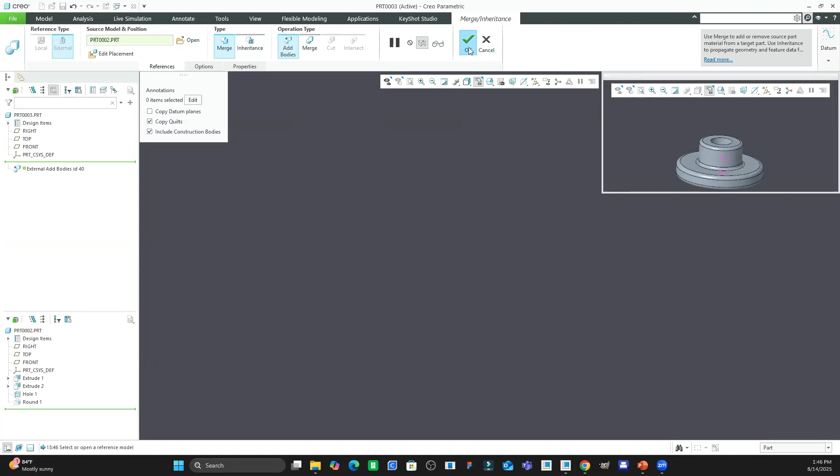So as you can see, I handed this off to a guy in machining, maybe, he's like, hey, I need to make some changes to this. So now he has this component, but he doesn't have access to all the features in the model tree that the engineer has. But what's nice is that his component will update because it's kind of external bodies. So you can see there's a reference model. If I open the reference model, it opens up the original one.

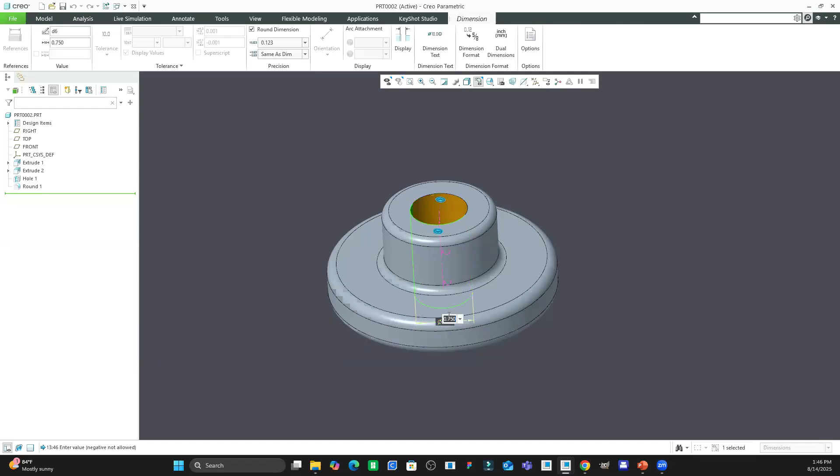So now if I come back in here and I edit this from 0.75 to 0.5, and I go back to this version, I can regenerate, and now you can see that hole is updated with the new size. So that's real nice, right? You can define the main dimensions in here for this component, but you're the only one that can say, hey, I'm changing the design intent of the component.

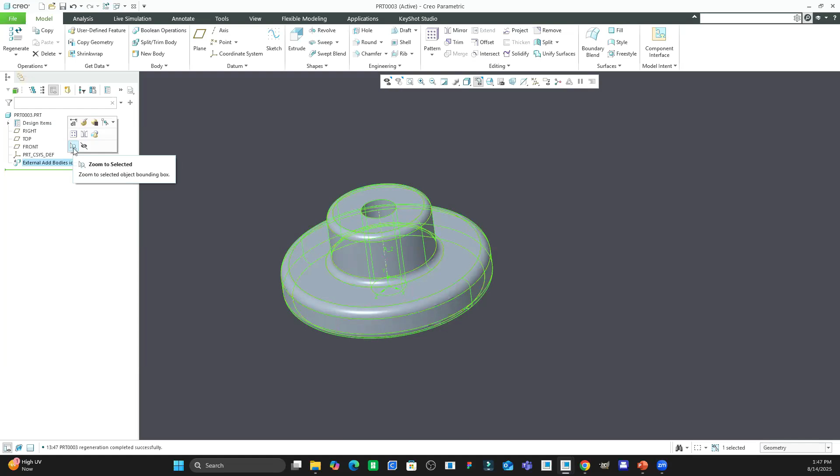But he still has the ability to chamfer this off, or he can add more holes here if needed. He can say, hey, we actually need a hole here, here, and here. He still has the solid geometry to modify, but he can't modify the original dimensions like you have. Now there's a different version. If I go back into the inheritance feature, there's merge and there's inheritance. If I select the inheritance and then click OK,

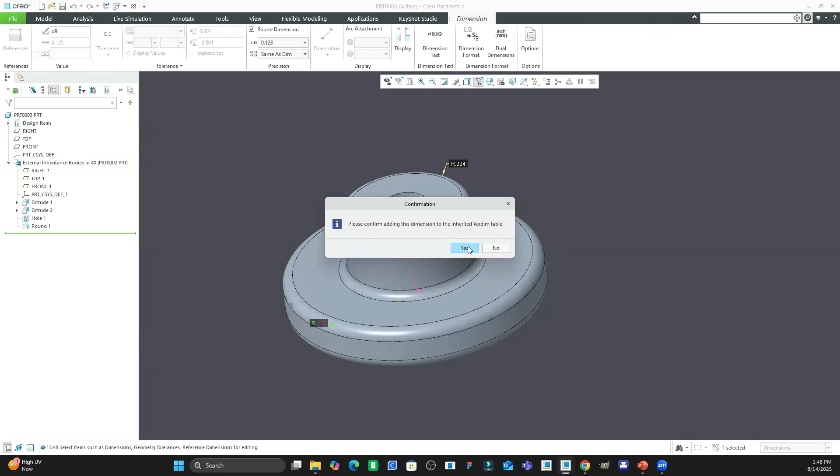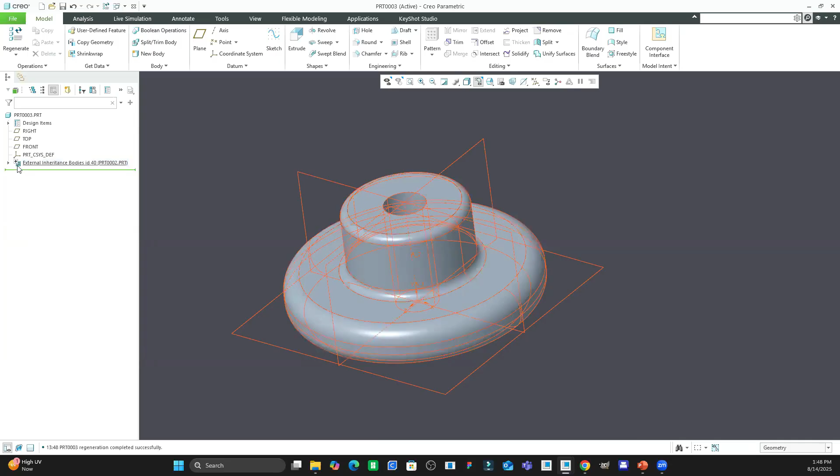this version has all of these features from the original. And then if you make any changes, so if I change the round here, it says, please confirm adding this dimension to the inherited Vardim table. We'll say yes. I'll change that to 0.3. That's way too big. Let's do 0.2. All right. So now there's a varied items table here, and you can see that I just added a new value there. Okay. And then I can say save source model.

So say you hand this off to the guy in machining who is really experienced in CAD as well. Maybe he has Creo knowledge, and he was like, hey, I'm tired of working on the computer, I just want to do the machining I used to do. So now he's back there, but he has good Creo knowledge. You trust him. So you give him the ability to use this inheritance feature with the features.

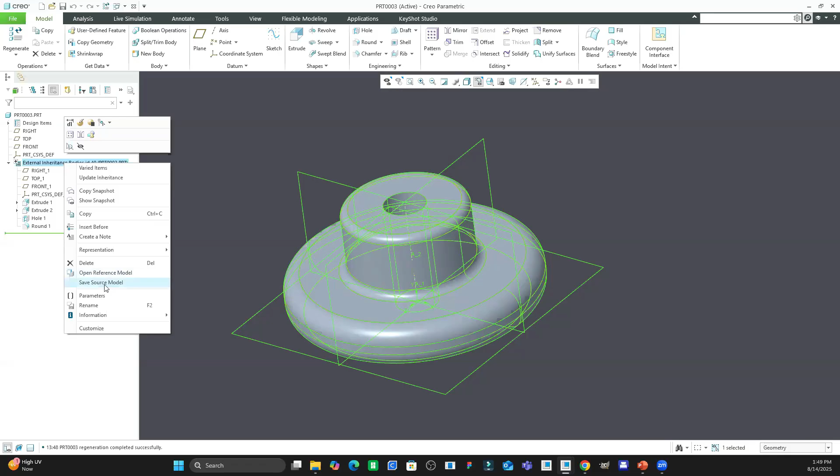You say, hey, you know what? These are the rounds that I added. If they should be smaller or larger, or the hole should be larger or smaller, I trust you to make that change. Now he can, and then he can say save source model, and then give it a name, for example.

Click OK, right? And now there's a new version, right? So what do you guys think of this? Are you using this already, or do you think it's something that you could use in the future?

I personally think it's kind of dangerous; it opens a can of worms in terms of model and version control. Because if someone creates a model and then publishes the inheritance, or the model in a certain configuration, I think that person should be the one in charge. But that's me. The person should be in charge of controlling its feature, and not giving anyone else the ability to modify things, because otherwise machining can say, well, I fabricated it to this, but the original model was that. So version control seems kind of critical here.

Because you rightly said, if you trust a person, which is good from a human point of view. Yeah, from a version control perspective, the water is murky. No, I totally get it. So I can really see this work in a smaller environment. It's a powerful way to incorporate changes. I would be careful about who makes what changes and when, and how that is controlled. Right. Yeah, it should have a use with caution in the feature somewhere, like a warning symbol, a caution symbol. Yep, I would agree with that.

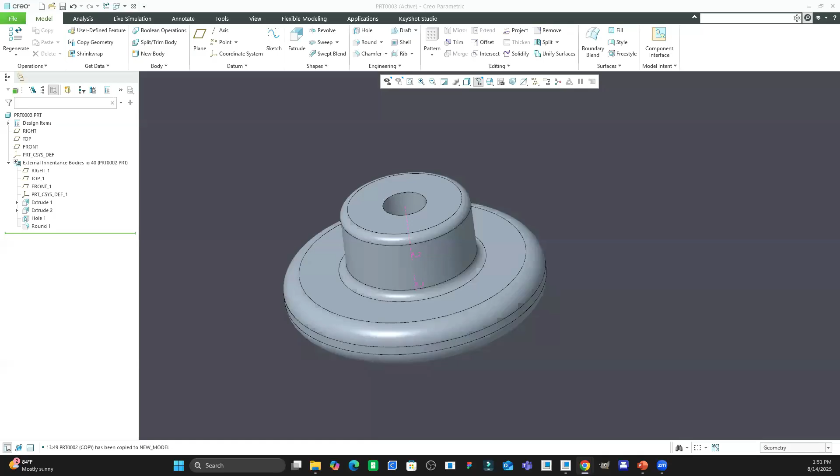I have one more comment or suggestion. With the automatic rep and making the reps on the fly when you open, there's a config option where it never asks you what rep you want to open when you open things. That's deselected by default. And then there's also a config that you can always open the default rep. And that would also kind of bypass that step too. I gotcha. Great. So it'll be in here somewhere.

Trying to find it myself here. Open simplified rep by default. Okay, great. There it is. Retrieves a model and specified rep. Yes, use open rep dialog. No, retrieves a default rep, which is the master rep unless defined otherwise. Specify name, retrieve the specified rep when it exists. If not, the default rep.

Oh, great. Thank you for sharing that. So you could always name a rep like simple. And then if you ever make a simple rep, it opens that. Right. You saw the description. So it gives you a lot of automatic control if you want to do things the same way. No, that's great. Thanks for sharing, Zach. Appreciate it.